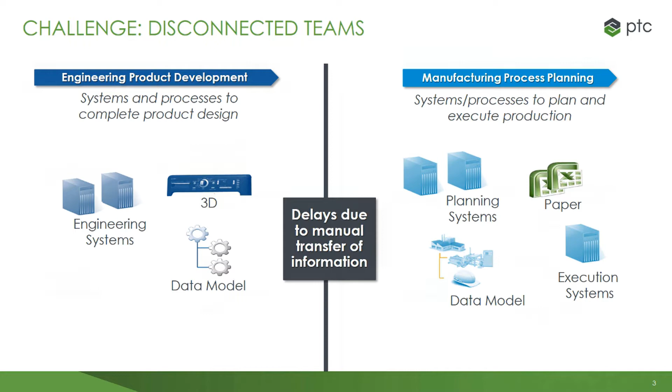Inconsistent data management results when each area of the business focuses on managing only a portion of the entire product definition. It is common for product design to be totally focused on the development of the product. To do this, they concentrate on the design intent and define the product details based on how they do their work. Product development often organizes their data by the type of design data and groups of design features.

It is also common for manufacturing planning to be focused on defining how the product will be produced. They concentrate on the manufacturing strategy and define the manufacturing plan based on utilizing production methods aligned to a facility's capabilities and the factory floor layout. In some cases, manufacturing engineering needs to consider variables resulting from multiple factory locations and strategies.

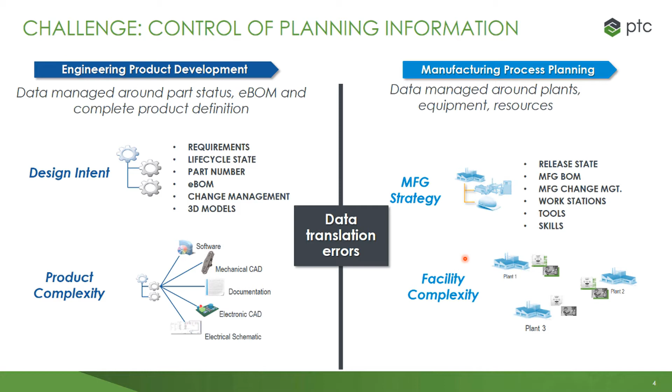Each group's focus on their own deliverables and data, combined with a patchwork of data transfer methods, often results in data translation errors and leads to delays in dealing with design updates and changes prior to the product's start of production. During development, the engineering product development teams will typically perform product design reviews to improve and enhance the product.

Manufacturing engineering uses design for manufacturability reviews to identify potential manufacturability issues before production begins. If manufacturing engineering is not involved early in the design process, they will not be aware of key manufacturability issues, and it may be too late to modify the design to eliminate those issues, or the last-minute change requests from manufacturing engineering needed to support the factory requirements can impact the product's start of production date.

These separate processes are usually the result of different goals, objectives, and deliverables for each group. These differences limit the organization's effectiveness and lead to missed opportunities.

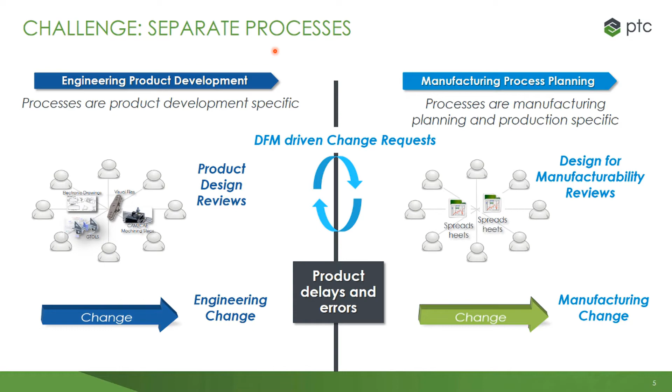When we look at the manufacturing engineering teams, we see that they have the responsibility to plan production for a single product that could be produced in multiple plants with varying resources, machines, and worker skills. When the companies do not have standard manufacturing processes that include detailed information about a specific factory's capabilities, the manufacturing engineer's job becomes very challenging.

Most companies do not have a way to manage a central library of plants, workstations, worker skills, and tools. If manufacturing engineers could leverage existing knowledge, they would be able to reduce the effort to develop manufacturing process plans for multiple plants. The missing management of factory capabilities and manufacturing processes limits the business's flexibility to decide where a product should be manufactured.

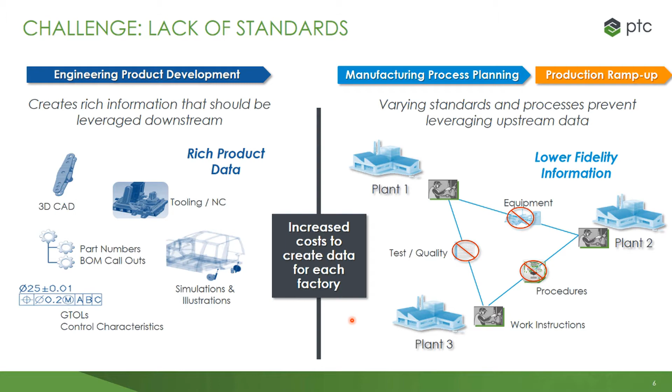The business costs resulting from these challenges are significant. Delays in the transfer of design information to the plants, data quality issues, and late changes to the design all have a direct impact on product development costs, quality at start of production, and missed launch dates.

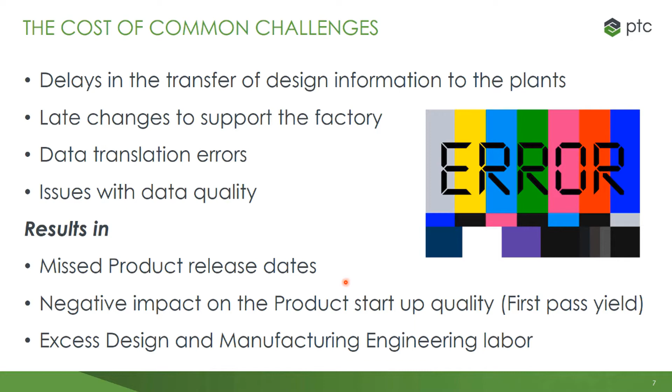For the remainder of this session, we will focus on a fundamental process that will enable your product delivery processes: the transformation of a product's E-BOM into an M-BOM. The resulting M-BOM is required to support all manufacturing planning activities and deliverables. Using the right tools and methods to create this critical set of information will give your business a competitive advantage.

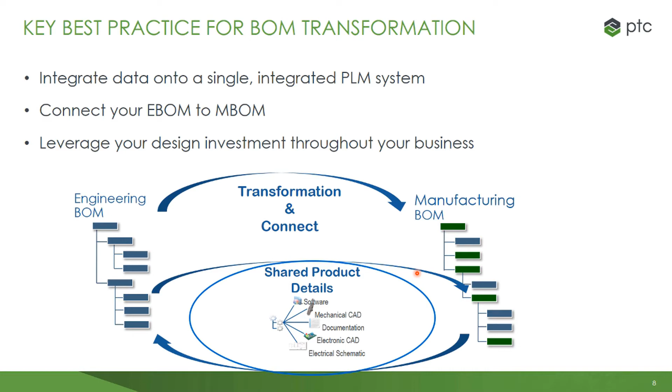In the upcoming demonstration, you will see how completing the E-BOM to M-BOM transformation process within an integrated PLM enables the entire product development team to leverage 3D models, E-BOMs, M-BOMs, and product specifications throughout all aspects of the business. Two key aspects of the PTC toolset will be highlighted.

First, the ability to quickly create a restructured and enhanced bill of material from an upstream source, and second, the capability to create links between BOM components in different types of bills of material. The restructuring of BOMs allows the business to accurately align the organization of an M-BOM's components to match the requirements of an ERP system. Structuring of a service BOM will support a company's aftermarket business processes.

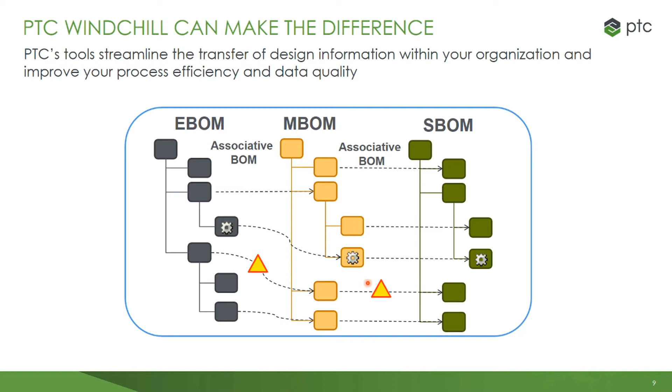The component-to-component links explicitly capture the details of the source and destination of the BOM components between bills of material. This linking also allows the system to indicate how changes to design will impact specific components in a downstream BOM.

Let's get started with the demonstration.

This demonstration will show how the PTC MPMLink BOM transformation tool can support early engagement by manufacturing in the product design process. Traditionally, the design process has included concept development, system design, and detail design, followed by development of the M-BOM and manufacturing plan to support production ramp-up and full-scale production.

This serialized approach limits the opportunity for manufacturing to influence the design and reduce costs before the design has solidified. Using the MPMLink tool can provide your team an opportunity to overlap the development of the design, the M-BOM, and the manufacturing plan. The coordinated design and manufacturing planning activities will lead to a reduction in time-to-market cycle time for your product.

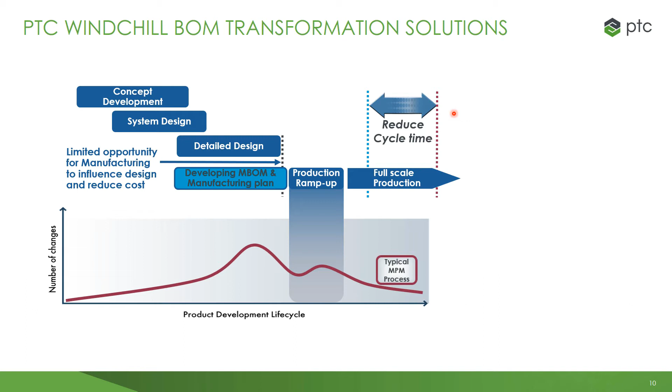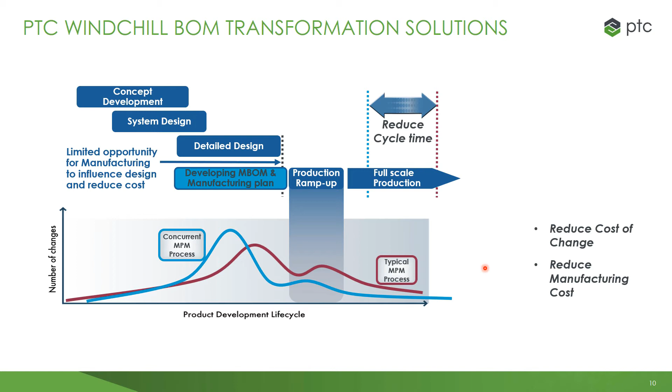It will also shorten the timeline and provide for collaboration within the product design teams to reduce the cost of changes during the design process, as well as a reduction in the final manufacturing cost. For our demonstration today, we will be using a battery box that is part of an off-road vehicle.

Using E-BOM visualization, we look at the design by turning off and on the visibility of specific parts to allow for a detailed design review. Changing the part structure view options results in the display of the CAD model details for each of the E-BOM components. Continuing the design review, the Part Structure to CAD Structure Compare tool is selected.

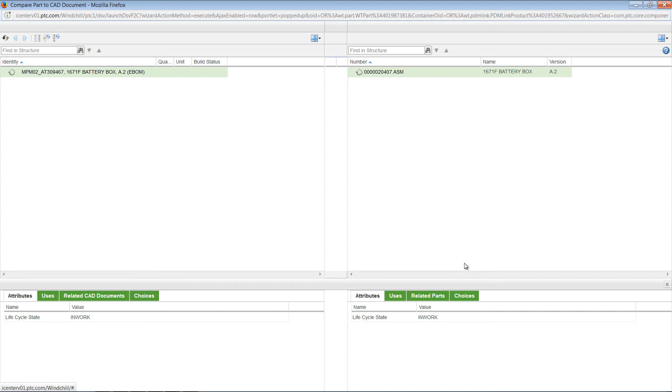Confirming the comparison set, the system displays the Windchill Part BOM and CAD BOM in side-by-side panels. Selecting a BOM component on the right side highlights the corresponding component on the left side.

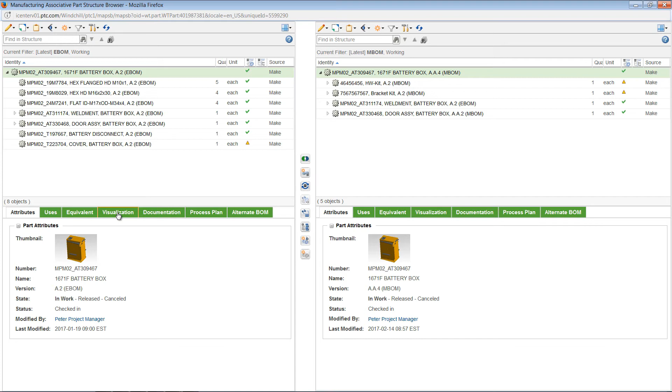Now we begin the E-BOM to M-BOM transformation by opening the Design E-BOM in the Manufacturing Associative Part Structure browser. The E-BOM is displayed in the left panel, and the right panel is displaying a partially transformed M-BOM. Notice that the 3D visualization provides a good way to understand both the CAD structure and the shape and interfaces between the components in the assembly.

For the next step in the BOM transformation, the visualization indicates that the cover has not been placed in the M-BOM. Since our manufacturing strategy is to purchase this from an external source, we will use the copy-paste action to create a unique manufacturing part number in the M-BOM.

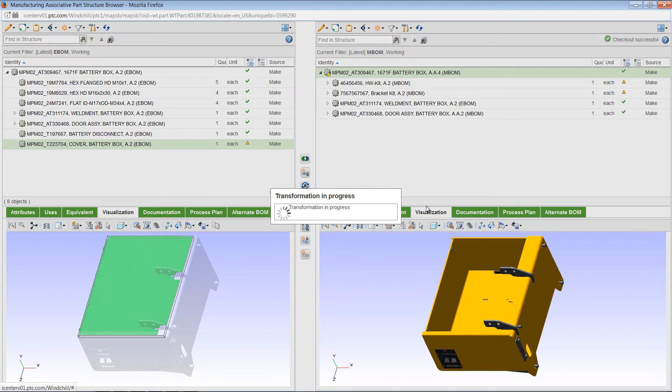The Paste as New Part dialog defines a new part number by adding a suffix to the engineering part number, but other numbers can be used to match your ERP requirements. Once the new manufacturing part is displayed in the M-BOM, we will need to edit its source attribute to indicate this is a purchased part.

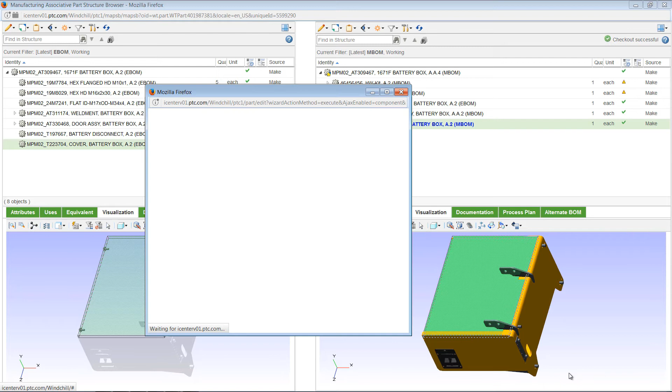Using the action menu on the cover part, the Edit Part dialog panel is opened. We proceed by picking the Buy option for the source attribute, followed by a check-in action to record this change in the MPMLink database. A quick visual comparison of the BOMs shows that the M-BOM has source defined as Buy, while the equivalent E-BOM cover part has source defined as Make.

Checking the design view, we can clearly see that there are two fasteners that have not been placed in the M-BOM. Selecting these items directly, followed by a copy-paste action, adds these items to the M-BOM.

At this point, a review of the design view confirms that all components have been placed in the M-BOM. The M-BOM is now checked in to the database as complete.

Prior to the demonstration, an initial E-BOM to M-BOM transformation resulted in the placement of 5 fasteners into a kit and a subassembly in the M-BOM.

To review the distribution of these items, we select the E-BOM component and then request the Select Equivalent Parts on Other Side action. This expands the M-BOM structure to show where the individual fastener components are used in the M-BOM. These items can be visualized by using the Show Selected option in the M-BOM visualization panel.

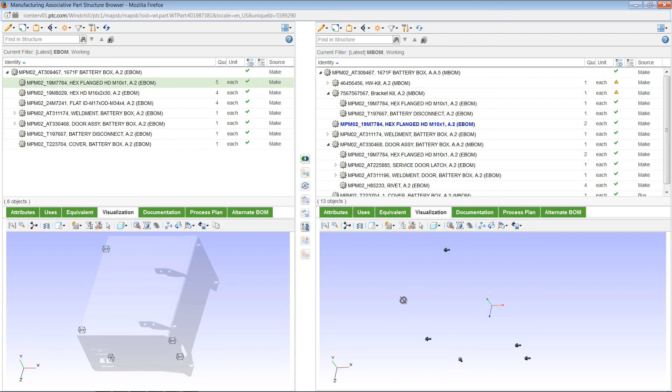A critical aspect of a robust design process relies on the ability for all team members to see the progress of the design and manufacturing engineering teams.

Using MPMLink to display the battery box design allows everyone on the product delivery team to see the current elements of the E-BOM design view.

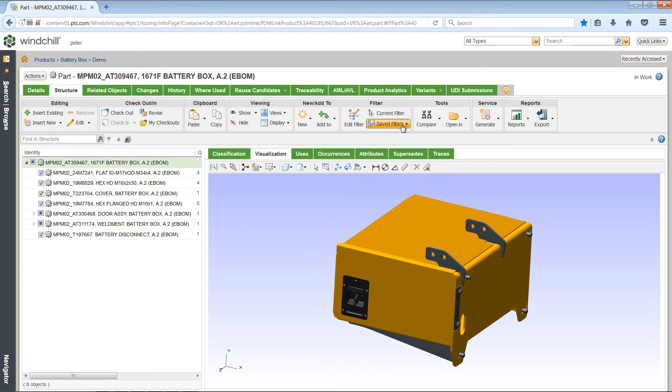Setting the filter to M-BOM allows team members across the organization to review the results of the E-BOM to M-BOM transformation. The displayed M-BOM structure detail provides insight into the manufacturing strategy. Using visualization, the external and internal components are clearly visible.

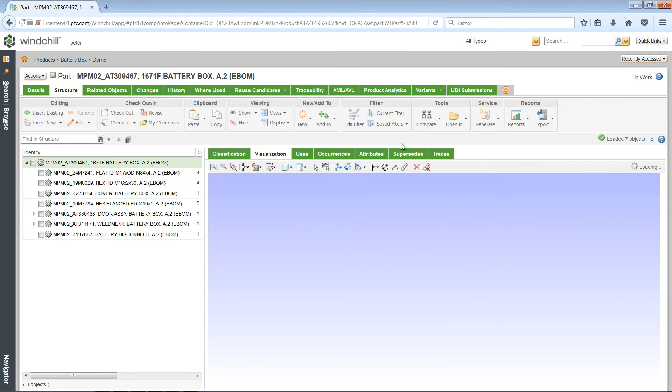During a design review, it was decided that a label was needed on the face of the battery box cover. Using Creo Parametric, the engineer adds a new part to the Creo assembly that defines the label.

Following a Creo check-in, PDM-Link automatically updates both the CAD assembly structure and the PDM-Link BOM. Refreshing the E-BOM visualization for the design immediately reflects the results of the design changes.

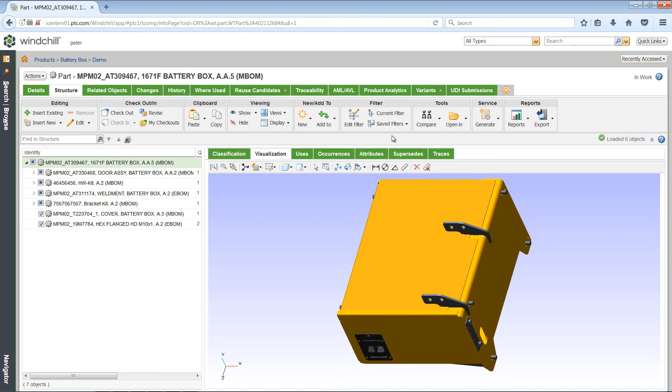Note that the M-BOM visualization of the battery box is reflecting the earlier design configuration. The Manufacturing Associative Part Structure browser is open to update the previously transformed M-BOM to reflect the new cover label.

Refreshing first the E-BOM and followed by the M-BOM results in the maps displaying both the current BOM structures and the corresponding visualizations. Note that the top assembly M-BOM part is displaying a clock icon indicating that it is out of date in relation to the E-BOM equivalent part.

Starting with the top part, the Update to Current Upstream Equivalent Object action is applied. This reestablishes an updated equivalence link between the parts.

The M-BOM cover part is also displaying a clock icon indicating that it is out of date in relation to the E-BOM part. The same Update to Current Upstream Equivalent Object action is applied.

Refreshing the M-BOM visualization shows the new cover with a location for adding the design view label.

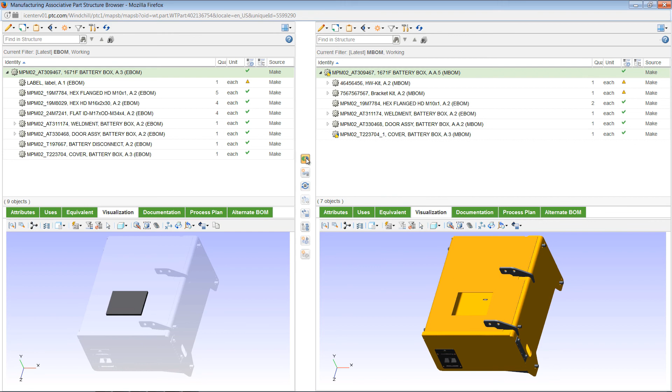Rather than manually searching for the label part in the E-BOM, the Reconciliation Assistance feature is selected. The tool identifies that the E-BOM label part is missing from the M-BOM and is highlighted in both upstream panels.

Using a copy-paste action, the label part is added to the M-BOM, and the visualization panels for both BOMs are updated to reflect the action that was taken.

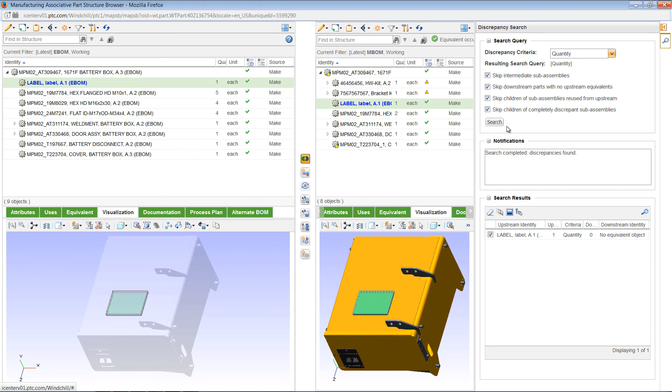Re-executing the discrepancy search returns an empty list indicating that all of the E-BOM components are included in the M-BOM.

As the final step in the E-BOM to M-BOM transformation process, all updates to the transformed M-BOM are checked into the MPMLink database. Utilizing the M-BOM view on the MPMLink part details page, we can see that the updated M-BOM is now available for sharing to the entire product team.

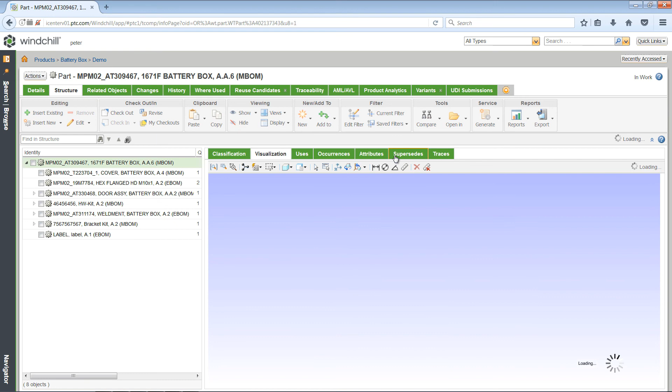The focus of this demonstration was to highlight the value for your product development teams to be able to simultaneously complete the design and manufacturing engineering activities in advance of a production ramp-up. This will shorten your product's time to market and reduce the cost of change and the cost of manufacturing.

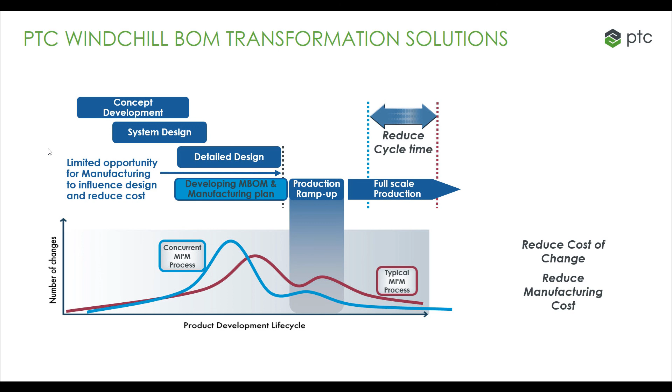Now let's do a review of what you have seen during this demonstration. We started by completing the E-BOM to M-BOM transformation for an initial design.

We then highlighted the capability to share the manufacturing and design engineering results to the entire product development team as M-BOMs and E-BOMs with 3D visualization.

We showed how a design review triggered a change to the original design that resulted in a label being added to the battery box cover.

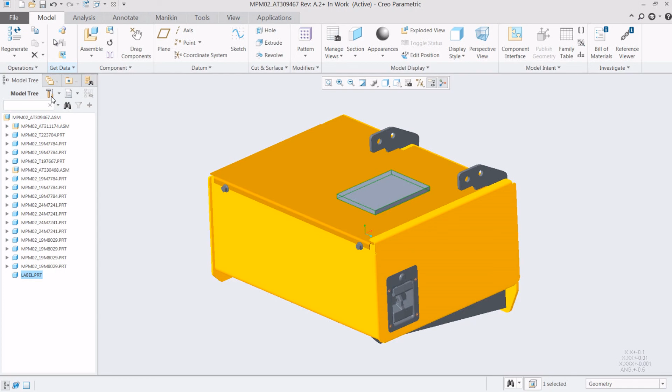The final steps of the demonstration included an incremental update to the initial transformed M-BOM using the Manufacturing Associative Part Structure Browser. Thank you for your attention during this demonstration.